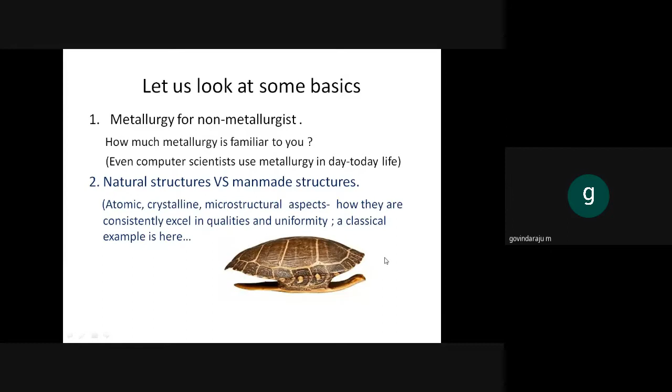Some of the words we might have seen, for example, in the last 15 or even 20 years before, everything used to be nanotechnology, nano-based. Let us start our research in nano, that's what used to be the buzzword. It's almost settled now.

But is it anything new? Are we not using any nanomaterials? We are using nanomaterials in day-to-day life also. You are also using, I'm also using. So we will come to that: what all are the nanomaterials we use?

Nanostructures, nano coatings. Is there any example right now? Yes, you take your SIM card or any electronic gadget. You can have a nano coating, a nano gold coating on the structure. Hope you know why it is gold coated and why it is nano gold. One is for technical reason, another is for commercial reason. Why it is in nano size, it is for commercial reason.

So are we not using any composite or any metallic ceramic? Yes, we are using. Hope you know about the carbide tool, what exactly is a carbide tool? Carbide tool doesn't mean that it is only carbide. It is a composite. It is a perfect case study and perfect example for a metal matrix composite.

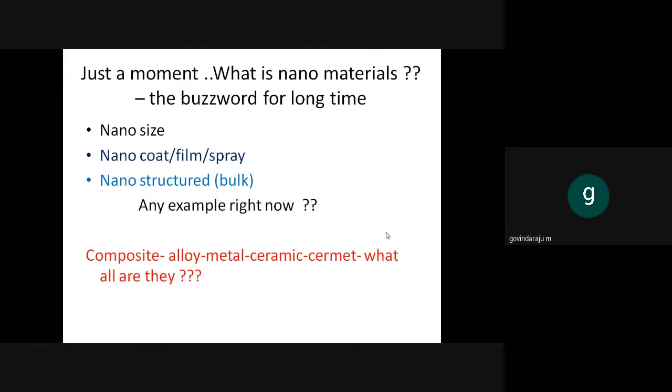A few more nanomaterials. Why are we talking about these particular materials? Because they are part and parcel of the composites. When we are talking about composites, we are talking about matrices and reinforcements. Sometimes we call reinforcement as fibers, and we are not worried about fillers and all other things for the time being. So let us talk about the matrix. Anyway, it is a large structure, we know it. And now let us talk about the fibers or reinforcement.

If you take a simple example, a braided garden hose, which is available in most houses, not the plain polymer hose, you can see a bunch of glass fibers embedded in it. If you take out that bunch and take an individual glass fiber, it is near about nano size.

So when do we think we use glass in day-to-day life? We use mirrors, which are silica based. And when you go for industrial glasses or glass fibers, it is similar, with some additives, but the majority of the composition is still silica based. But did you ever think about how to make glass flexible? To some extent it is ductile, not as brittle as we see in home mirrors.

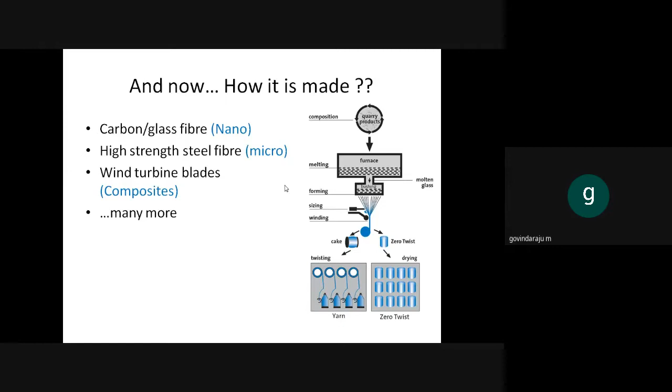Hope we are familiar with all these words like polymers, glass fibers, carbon fibers. We handle composites in day-to-day life many times. We handle metallics also many times. And some of the manufacturing, we are yet to know, so we'll see those things. This is the typical common example for composites. I put mostly metallic side examples, not polymer side. These are the composites - there are a few polymer examples.

One is the copper bottom vessel. You might have seen such a vessel in your home - few stainless steel vessels are copper bottom, copper coated. There are a few questions on this. First, how do they put that copper bottom? What is the process of manufacturing? Second, why do we put copper? Third, why are stainless steel and copper kept separate? Why can't we make a copper-stainless steel alloy and finish the work?

Then the aluminum conductor, I just explained. Teflon coated utensils - though metallurgically Teflon coated items are not suitable for Indian cooking style since we overheat it, Teflon coated utensils, non-stick tawas, and all non-stick utensils are another typical example of a composite. It's a metal-polymer composite - a metal item is reinforced, with polymer coated outside. Then there's the nano gold coated SIM card.

Tinned copper wire - you might have seen some copper wire only at the edge appears in a gray color. That is a tin plated coating to avoid oxidation, only at the edges. If it is a long cable, one kilometer long, with insulation, the copper cable itself is a composite. But when we see at the end, it is tin coated.

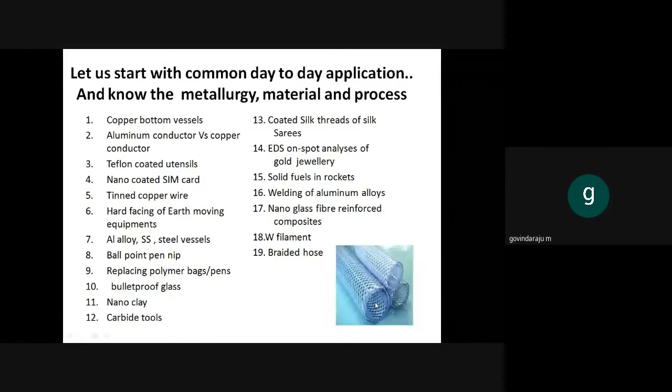And composites in the strategic sector, something like space, aerospace, nuclear - what all are used there? These are a few words, we will try to learn one or two case studies. One is tungsten alloy. Hope we are aware of tungsten, it is used in filaments. Tungsten alloys are famous for very high density and very high temperature application, but unfortunately only in a controlled atmosphere.

Superalloy - the name superalloy is a colloquial name. Superalloy means an alloy which can operate in any environment at 700 degrees or above, or even above 1000 degrees. So naturally the application comes to aircraft engines.

Maraging steel - if you have not heard that word, this is nothing but, if you see any satellite launch particularly from the Indian side on TV, or some of you might have witnessed it, the round structure you see - what is that material? What is inside, what is the fuel, and how the satellite is assembled - forget about those things. Only the pipe is made up of maraging steel. And superalloy, already told.

Another thing is titanium alloys. Hope you know what we use titanium alloy for - it is also for aircraft application. Titanium alloys are famous for lighter weight. For example, if we take any superalloy or steel, the density is around 8 grams per centimeter cube, whereas titanium is just half of that.

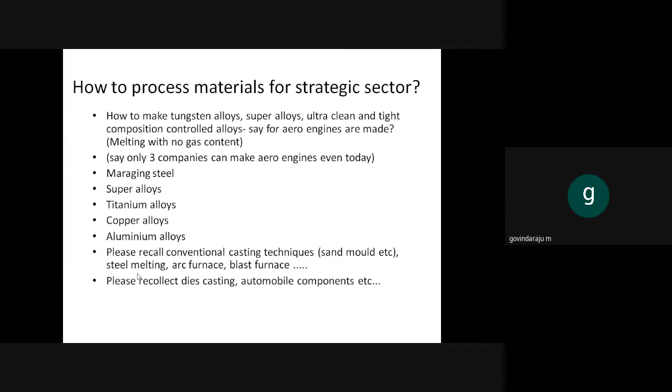When we talk about these materials, naturally the question comes: how do we make this material? What is the procedure, what is the difficulty? For example, take super alloy, used to make aero engines. There are only 3 companies in the world that can make aero engines: Pratt & Whitney, GE, and Rolls-Royce. It's 2021, June 1st, and still only 3 companies can make them. Boeing and Airbus are aircraft manufacturers, not engine makers. So why can only 3 companies make aero engines? Why don't we make it? Is there any company that makes the whole aero engine assembly in India? We are still struggling. Why? Simple, it is materials.

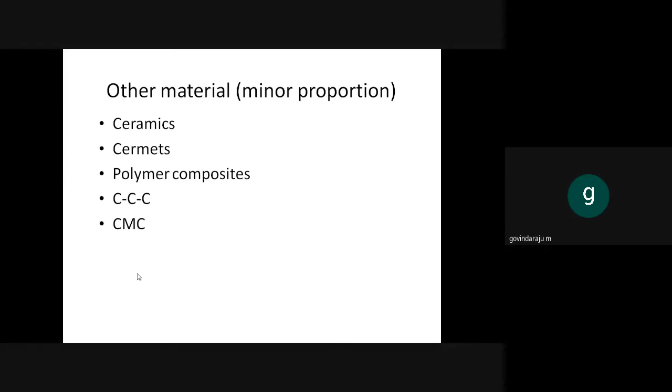There are some other materials you have to remember. One is ceramics, another is cermet. Cermet is nothing but ceramic plus metal, so automatically it is a composite. And of course, polymer composites you are aware of, and carbon-carbon composites, ceramic matrix composites. There are a few other composites. For 1.5 hours, we can only cover this much.

Now let us start the introduction. First, we should know about the materials. To know about the materials, we should know the classification of materials. First and foremost is metallic versus non-metallic. We classify the entire spectrum of materials into two things: metallic and non-metallic. In metallic, we have metals, alloys, and certain composites. Examples of metals: silver, copper, aluminum, nickel, tin, pure gold - not jewelry gold, pure gold.

Next is alloy. What is the example for alloy? Stainless steel, brass, bronze - there are many. Metallic composites - is there any example? We should link to advanced applications, but first we should know the basics, then we can go for advanced applications. Second, we should link everything to material familiar to us, which we use at least once in a lifetime. So for metallic composite, a typical example is your carbide tool.

Another typical example: if you take a mixie, DC motor powered item, for repair, they might say carbon brushes worn out, carbon brushes gone. What is a carbon brush? Or if you take railway electric lines, you might have seen they are always zigzag, and the pantograph is touching that power line. How much wear and tear is there, and what material is used there? Those are all metallic composites.

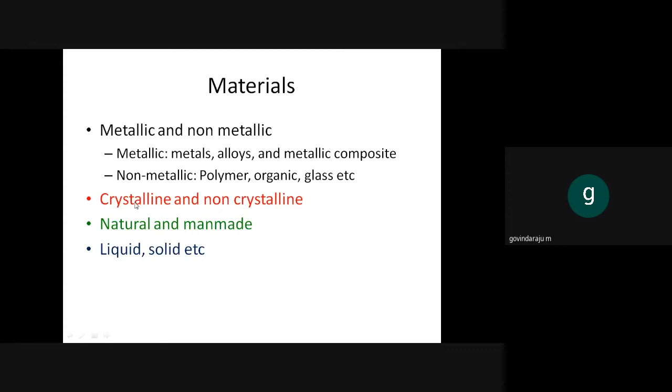So all the metallic and few non-metallic items are with unit cell. And here comes the main difference. Crystalline means it must have unit cell. Non-crystalline, there is no unit cell. Then it is time to learn what is unit cell.

So what is unit cell? Atoms arranged in a particular regular arrangement, that's what is unit cell. It's a regular arrangement, but it is the smallest possible regular arrangement, smallest size. That's what is FCC, BCC, HCP, all those things. So this is unit cell.

So here it is regularly arranged. Next will be next unit cell, like that, like that, like that. The entire spectrum of materials with unit cell - this is what is crystalline, and this is what is most of the metallics.

Then comes grain and grain boundary. All other things like inclusions, additions, etc., let us see later, including the phases. What is phase? So next is grain. What is grain? What is grain size? What is grain boundary? See, we know what is atom, we know what is unit cell.

The thing is, if it is a crystalline material and if it is a metallic material, it is something like this - the atoms are arranged regularly. If it is a non-metal, unfortunately, there is no non-metal microstructure. The atoms will be arranged in a random manner, maybe in zigzag lines, a few lines like that. There is no regular arrangement like this.

Now we have to learn what is unit cell. Unit cell is nothing but some combination, and next is grain. Grain is nothing but the combination of unit cells with the same orientation. This is one unit cell, next will be here, next will be here, and this is the orientation. It is parallel to x-axis, is it not? One of these planes is parallel to x-axis.

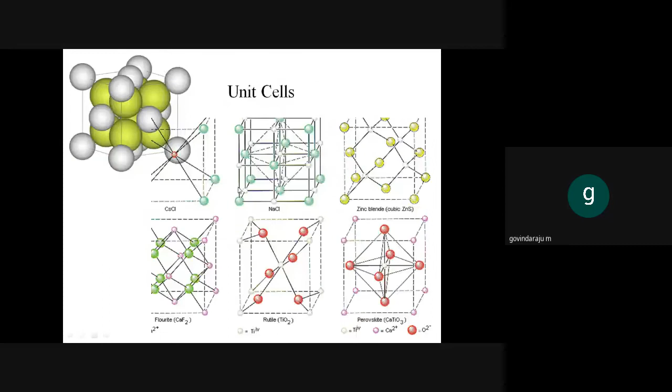So now we know atom, unit cell, grain boundary, phase, all these things. So why are we learning these things? These are all very important for understanding metallic composites.

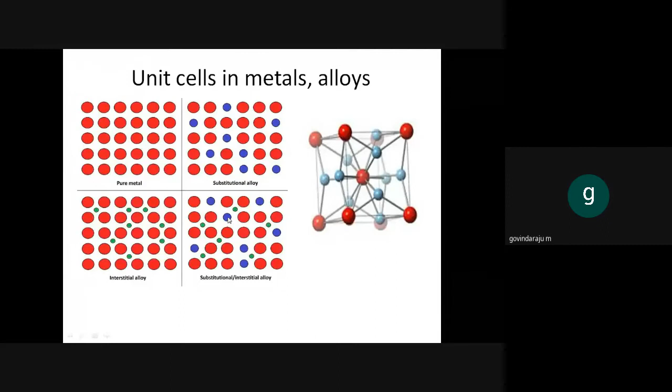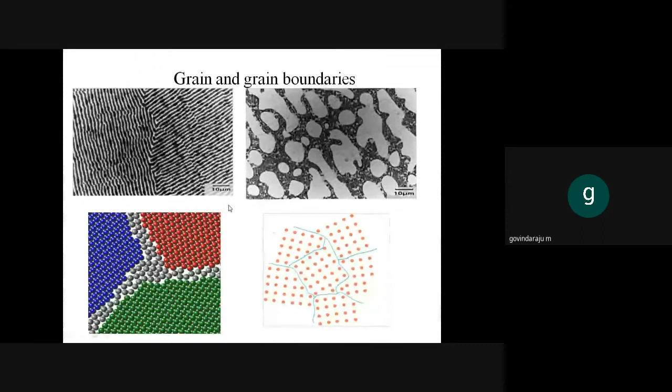So different structures. So the grains are oriented in a different manner. You can see spherical, lathe-like, longitudinal, irregular, regular, small size, big size. These are all variations. But what is common is phase, atoms, unit cells, alpha, beta, etc. So this is the basics about the materials, metals and alloys, and certain composites.

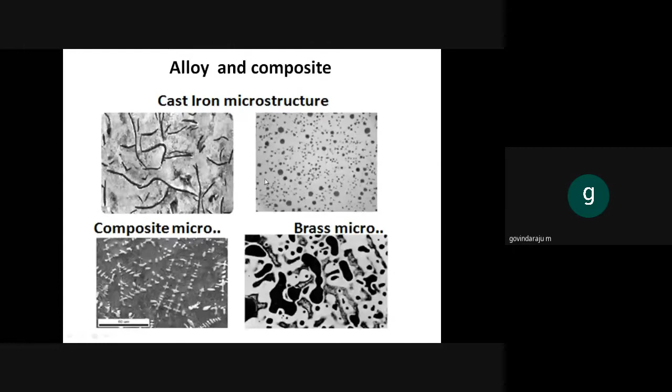And these are another microstructure, brass, bronze, etc., only for understanding. Now, before going into composite, let us learn how we make metallic materials.

First of all, metals are extracted. Let us not go deep in this. After extraction, if it is a metal or alloy, both are done casting. Why is it casted? That's only how we give the shape. We know that. As a mechanical engineer, you know all the sequence: casting, machining, forming, welding. Where do we stop casting? Engines, like where do we stop machining? Precision parts. Where do we need forming? Shapes. Whenever we need shapes, we need forming. And why do we need welding? You know that. So these are all familiar.

Now, there are certain other processes which should be familiar. First thing is powder metallurgy, so PM, powder metallurgy. Other things are chemical vapor deposition, physical vapor deposition, stir casting. These are all just a few words. Among these, let us look only at powder metallurgy. These are all only self studies: chemical vapor deposition, physical vapor deposition.

So if you cannot make a certain material using this route - casting, machining, forming, welding - then you have to look at the alternative processes. One alternative process is powder metallurgy. One example for powder metallurgy is tungsten powder.

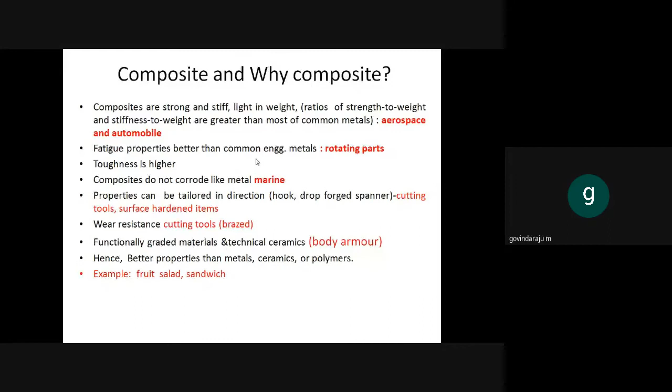Another thing - when you make an alloy, the individual metallic properties are changed, we get a new property. Whereas in a composite, we know the individual constituent properties are retained, and we get a combination of those properties. So structure-wise, this is what an alloy looks like, as we have already seen. A composite means it will be like this - just touching each other, mixed, a physical mixture, physically distinct.

And there is one more word left - ceramics are compounds. What is a compound? We know that. For example, if you take any ceramic like aluminum oxide, or any other crystalline compound like salt - let us take NaCl - this structure will be like this. You can see the difference. This is random, is it not?

If you are making an alloy, it is a mixture and the unit cell is homogeneous, but there is some randomness, is it not? Here in composites, it is perfectly separated from each other. Whereas in a compound, at the unit cell level itself, it will be a fixed composition and perfect. I told you a few minutes back what is a phase.

Let us say iron and carbon. Pure iron is alpha phase. Iron with 0.1% carbon is also alpha, and that is also steel. Iron with 0.2% carbon is also alpha, and that is also steel, is it not? Up to a certain limit. What is that limit? That is the solubility limit - up to that solubility, it is always alpha, it is always an alloy. An alloy can have various compositions, is it not - 0.1% carbon, 0.2%, 0.05%, anything. So that is the randomness, that is what an alloy is. Whereas in a compound, it cannot be - you know that, and the structure will be like this.

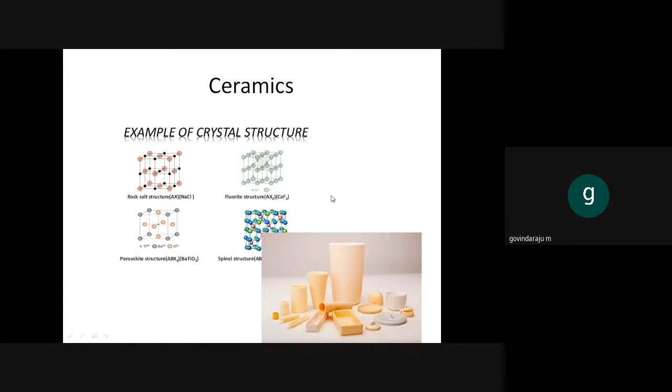After that, it is heated to that temperature, which is called sintering. Sintering means there will be a lot of diffusion. Let us go back to the atomic level, like this alloy. When you heat it, these atoms will move here, that atom will move there, all the atoms will be jumping here and there. That's what diffusion is.

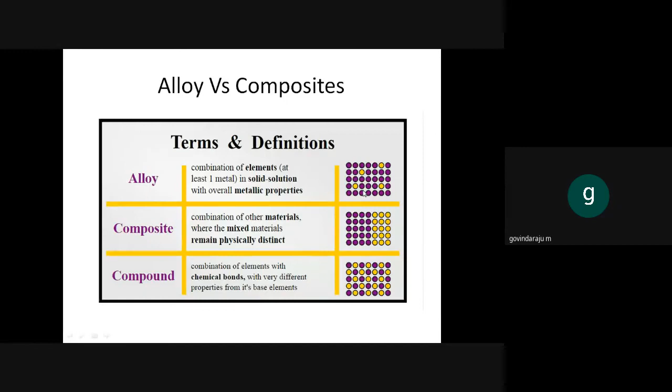Now, in this case, in between the cobalt powder particles, there will be a lot of diffusion. That means all the cobalt powders will combine and form into a single piece.

Now, there will be wetting between this tungsten carbide and cobalt. What is wetting? If you put a drop of water on the floor, that will wet. If you put a drop of water on glass, that will not wet, is it not? But here it will be wetting. That means there is a small thickness of liquid cobalt layer surrounding this.

Now, this cobalt being a single piece, all joined together due to diffusion and heat, you can assume it is partially melted also. And there is nice wetting between this and this. So all are joined together and kept together. Now you cool this product. After sintering, you cool the product. You got a tungsten carbide tool, as simple as that.

This is what a composite is. Assume cobalt stays the same, but instead of tungsten carbide, you keep another powder, let's say silver powder, nickel powder, or tin powder.

So we heat to 1000 degrees Celsius, let's say. What will happen to cobalt at 1000 degrees Celsius? Nothing will happen, only diffusion will happen. It will not melt, because its melting point is 1500 degrees.

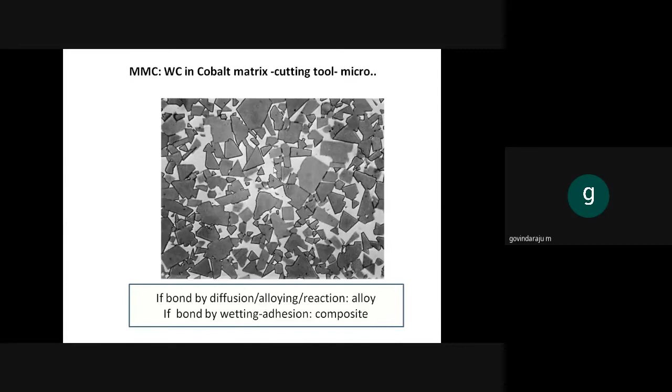Every material should be taken care of with respect to atmosphere. If not, either they will oxidize terribly or they will lose their properties, so we will not be able to use them for those applications. So this is the main point - materials and atmosphere, that is the processing atmosphere of the materials. Okay, one is processing atmosphere. Then what else do we have to look at?

See, when you talk about aerospace, naturally temperature comes into picture, high temperature. Whenever high temperature comes into picture, you might have this in any casting or casting related products - something called impurity, defect, or unwanted inclusions. There is no possibility of allowing any impurities in aerospace materials, so we have to maintain ultra high purity. That means all aerospace materials are processed in a closed chamber or closed container, which is called a clean room.

And other than these properties, two more properties to be taken care of: creep and fatigue. Hope you know what creep and fatigue are. Other than strength, hardness, oxidation resistance, corrosion resistance etc., we have to take care about these two properties. Creep is the high temperature failure. So when you make any material for aerospace, make sure your material can perform the required load at that temperature, not at room temperature. So you have to test it also at that temperature, then fatigue at that condition.

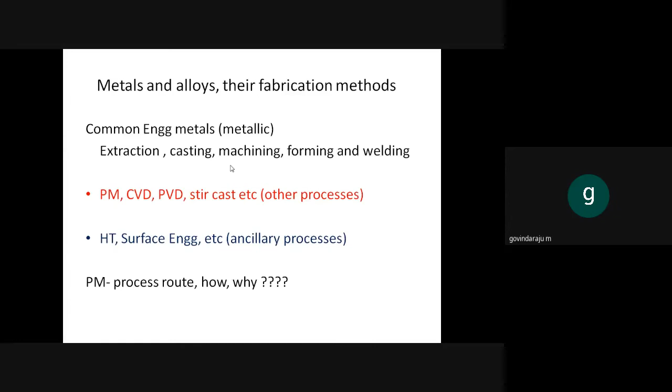In that there is a trick. The aluminum alloy cannot itself withstand its strength, that much high strength. So there are titanium fibers and titanium pieces embedded in it. So naturally it is a composite. We'll come to that later.

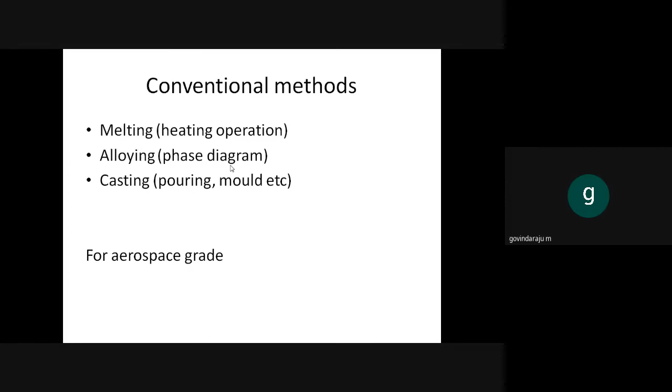In alloying itself, if it is for an aerospace or an application which is at high temperature, for example, this is the composition of a superalloy. What is superalloy? I told you a few minutes back, it is used in aircraft engines. And why we use superalloy? That is the only alloy which can take temperature as high as 700 plus.

And that is one of the best known internal combustion engines. And a material should withstand continuously a few hours at that temperature, meaning this alloy is developed. We are not going deep into how the alloy is developed, but this is its composition. You can imagine nickel, chromium, iron, molybdenum.

Just look at it. This is a 1500 degree melting temperature. This is something like 2000 degree melting temperature. You cannot melt it in air. Iron, we know it. Niobium is 2000 plus. And this also cannot be heated in air. Molybdenum is 2800 degrees. Titanium 1700 degrees. Aluminium 660 degrees Celsius. And cobalt, carbon, manganese, silicon, phosphorus, sulfur, boron, all these things are there.

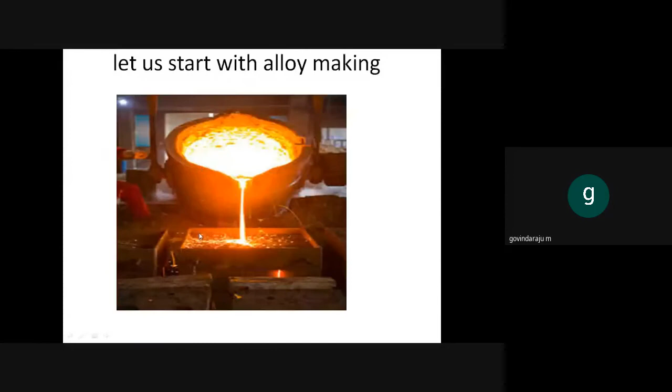If you do a simple casting like this for this alloy, that's all. There are some 13 different elements. Each one needs a different crucible and different atmosphere. How to make it?

And just see the composition. You have to maintain a tight composition. For example, I'll give only one example: aluminium. Here it is given, this is a textbook range, 0.2 to 0.8, but let us say people will stick to that only within 1%, maybe 0.6%, let us assume. Everybody will use only 0.6%.

What is the melting point of aluminum? It is 660 degrees Celsius. What is the melting point of this alloy? At what temperature is it melted? It's 1650 degrees Celsius.

See, when an operation is carried out at 1650 degrees Celsius, you are adding a metal which is melting at 660 degrees Celsius, that too in a meager amount, let us say 0.5%. In 1 ton, that means it is only 5 kg, is it not? When you do all the casting, finally you check that composition, the 0.5% aluminum may be only 0.3%, 0.2% might have evaporated. Or during adding, if you make any mistake, small mistake, after making this alloy, you have to throw out the entire piece.

Another example is titanium. The titanium problem: whatever crucible you use, it will react with that crucible. See, there are only a few possible crucibles. That means if you want a 0.65% titanium alloy, you have to add a particular higher amount of titanium in it, maybe 0.8% or 1%. That too will vary dynamically.

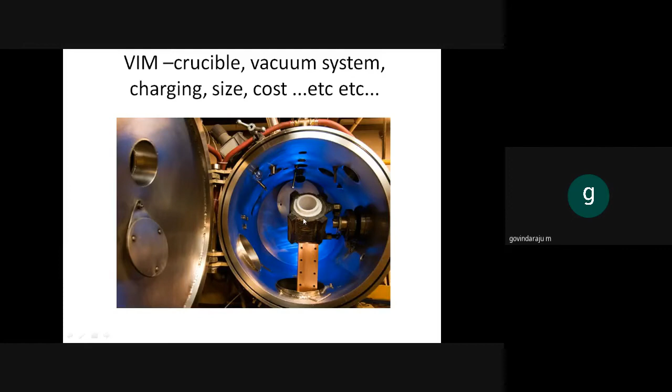Number one. Number two, when your operation is carried out like this, the cost will jump like anything, is it not? And number three, just look at this complexity. If steel can be made into 200 ton, 300 ton, these kind of alloys can be made into only 2 ton, 3 ton. Size limitation is there. Why these many complexities are there? So these are the difficulties in vacuum processing.

After all the forging and all the machining is done, you achieve the property. Heat treatment is also a must. Can we use that alloy as such? No, still not possible. We have to make it as a composite.

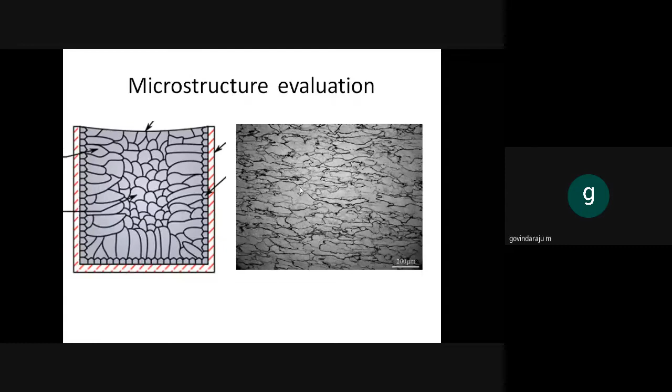What is that composite? For example, this is an aircraft engine, and there are turbine blades inside, compressor blades and turbine blades. Let us talk about only the blades which are in the high temperature combustion area. We know the alloy - what is that alloy? This is the alloy, super alloy.

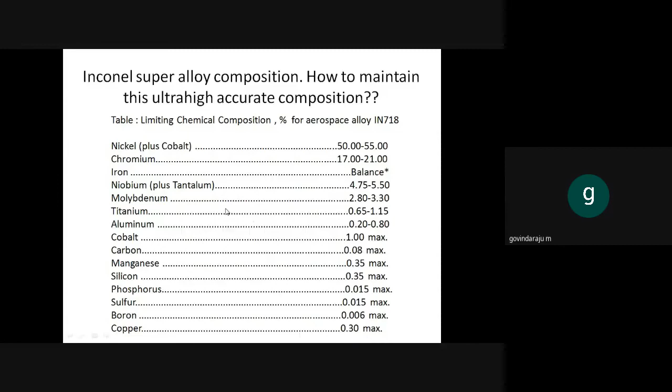We melted it. What are all the difficulties? And we made the structure also uniform, and we did the heat treatment also. Still, this cannot be used because the temperature inside can reach up to 1100 degrees Celsius. That alloy cannot withstand 1100 degrees Celsius. Then what do we do?

This is the thing what we are doing. This is the material used in aircraft, the super alloy. This super alloy is oxidized purposefully. What will happen? There will be oxide.

That is called thermally grown oxide, TGO, it is written here. Only a thin layer will be oxidized. Then above that oxide, there is a zirconium oxide coating. This is a typical example of a composite: the alloy, then there are two coatings, above that a ceramic coating.

Now, the thing is, it's something like a gear. The temperature above that is 1100 degrees Celsius, which cannot be withstood by the super alloy, so make a ceramic coating. What is ceramic? I explained earlier. Ceramic can withstand very high temperature, but unfortunately ceramic cannot have any ductility. So let the ductility be taken care of by the super alloy, and let the high temperature characteristics be taken care of by ceramics. But it is very simple to talk about; it is very, very difficult to make.

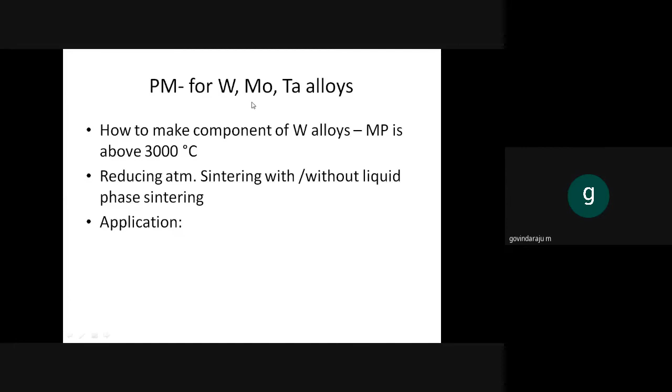So this is another example for a high-tech aircraft application. Yes, this will come back later. There are some other materials - tungsten, molybdenum, tantalum - all used for very high temperature applications. These metals are called refractory metals. They are all made through the powder metallurgy route, I told you already.

Okay, let us see another typical example of a composite. You might have seen a few manned missions for space, and when we return, some of the manned missions used to get dropped on the earth. When it's getting dropped, it should absorb a lot of energy, and the material should be accordingly designed for that.

So the typical example for a high strength material, but still it is ultra lightweight - not just lightweight, ultra lightweight - is called honeycomb structures. It is nothing but you take a sheet metal. Just after the lecture, you can open many videos available on honeycomb structure. This is used in crash-proof vehicles also.

So I am explaining this using a metallic material, but there are similar things in polymers also. Just like a honeycomb, take a honeycomb structure with certain thickness, is it not? From the picture, I can assume this thickness is something like 10-15 mm, that's all, and this is something like 1 foot by 1 foot. This is made up of a superalloy.

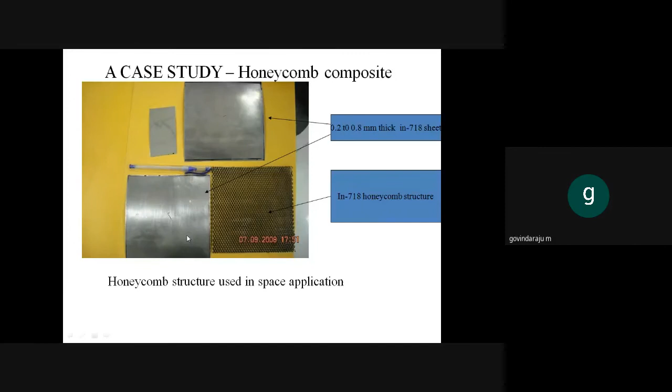IN718 is nothing but a superalloy, which we explained previously. So this honeycomb structure, we take it. Above and below, take the same material - 2 sheets. Now combine the 2 sheets like this. See, there is a bottom sheet, then this is a honeycomb structure, and there's a top sheet. After combination, it is combined now. We can see the honeycomb structure in between, visible.

After combining, you join it. See, now the honeycomb is made. You can see the middle is honeycomb, top and bottom sheets are combined together. How is it combined together? There is a welding process. This welding process is called brazing. So please remember this word, brazing.

Brazing is nothing but we are keeping another low melting metal foil here, and the whole combination we are heating to above the melting point of this foil, but below the melting point of this structure. What will happen? This foil will melt - there will be only a little amount, so it will form a bond between these structures, a metallic bond.

So we made this honeycomb structure. This is a typical example of it. This is lighter than water as a whole. Why? There are a lot of gaps - you see, a lot of gaps. 90% is gap, only 10% is material. But strength will be near equal to a solid structure, near equal. This is one of the great inventions by a few scientists, the honeycomb structure.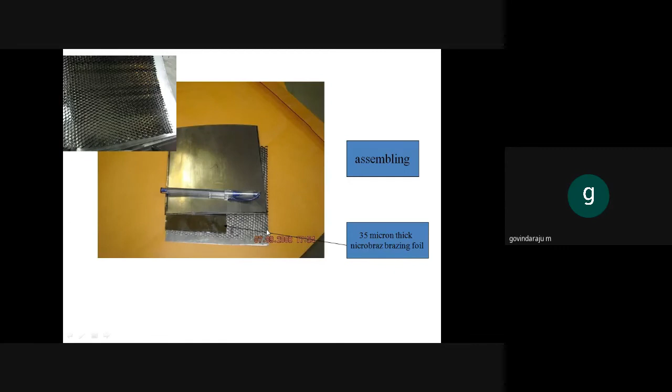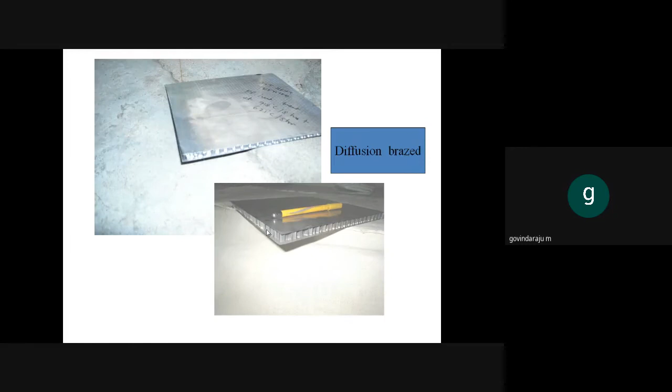This is being used nowadays in automobiles also. This is another case study. So what are the case studies we have seen? The engine material, tool, honeycomb structure. Any other case studies there? Yeah, this is the microstructure.

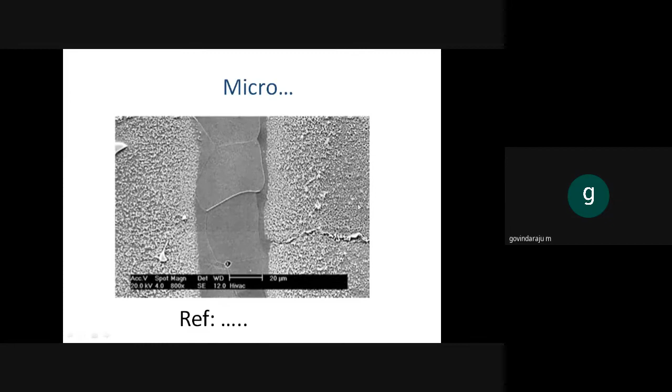If you do the joining, that is brazing. This is one side material, this is another side material, and the in between will be like this. So let us go back and see. Last topic for the day.

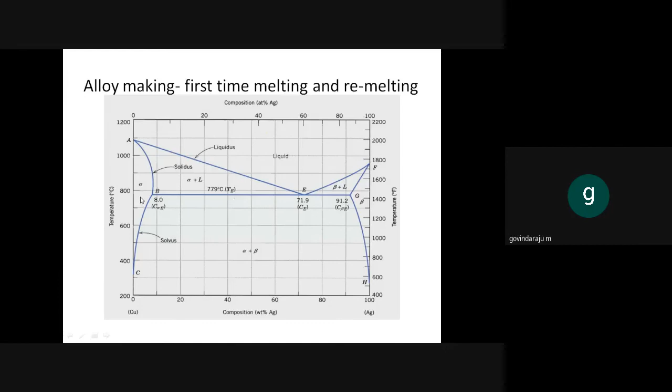So that aluminum will have an alpha structure. We know what is alpha, something it will be like this. And there is no beta in aluminum copper alloy, it is only theta. So alpha and theta will be there in aluminum. Let us go to that. Yes, this is alpha and this is theta. Hope you are aware about phase diagrams and solubility limit, alpha, single phase, multi-phase, etc.

How are we made this? How do we make this alloy? First step is alloy making, I told you already. You have to make aluminum and copper as an alloy. And why pure aluminum cannot be used? We don't have sufficient strength. We have seen in the first few slides, alloy is made only to make high strength. And why only 4.5% copper?

Number one, density. Number two, if you keep on increasing copper percentage, ductility will be lost. So we need a strength in a particular manner, so we are adding copper. We are making alloy. After making alloy you have to do forging, to make uniform microstructure. After forging, it is made into required shape, maybe thin sections, round pieces, square pieces, X, Y, Z, whatever you want, you make it.

If you want any forming, drilling, sheet metal, whatever you do, that you know already. But the thing is, how are we getting high strength in it? Just look at it here.

This is a typical casting, the last picture is something like a typical casting. What all are they? One is alpha. Alpha is nothing but a certain percentage of copper dissolved in aluminum. And there is a theta. It's a two-phase alloy, is it not? Alpha and theta are there. Theta is nothing but a compound, Al2Cu or AlCu2. There is a compound theta.

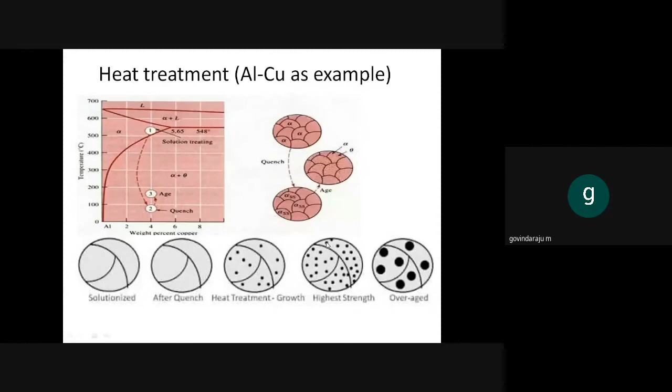What is the strength of this? I told you already, it is only 100 megapascal. So the entire portion is 400 megapascal, but only near the welding it is 100 megapascal. Can you use it in aircraft? Impossible, it will collapse. So this is the reason why we are not able to make an aircraft structure by welding.

This is the actual reason for aluminum alloys - people say aluminum alloy is not weldable. Why? There are 4 or 5 reasons. One among the reasons, the metallurgical reason, is this one: if you weld it, you will not get the structure and you will not get the properties we obtained.

But is there any solution? Imagine, anyway we have to weld it, no other choice. Yes, we can do it - you weld it first, then only you heat it. Weld it, then after welding you heat it. Don't do the heat treatment first itself.

Then you can ask, why is nobody in the world able to make it like that? Let aircraft manufacturers weld it and heat it - why is nobody doing this up to now? That's not that simple. Why? Because there is no furnace in the world which can heat something that size of an aircraft. Very, very difficult - you will not get the uniformity.

And once the structure is made, if you do heat treatment, that's all - mechanically you know there are thousands of stresses, bends, deviations, uniform and non-uniform in X, Y, Z directions. So finally you have to dump it and scrap it only.